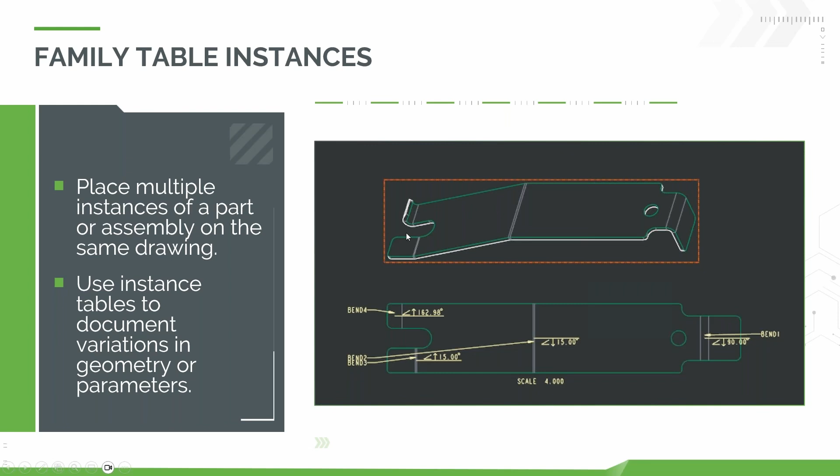Additionally, layers. So if you're not familiar with layers in Creo, maybe you might want to start the ball rolling with that. It's certainly something that's very powerful. People tend to underuse it, but it can give you a lot of control with respect to what you show in a drawing. It also gives you lots of control over what you show and see in the 3D environment, and is very powerful. Potentially misunderstood, or not understood to a full level of detail. So it's something to look at if you're not familiar already.

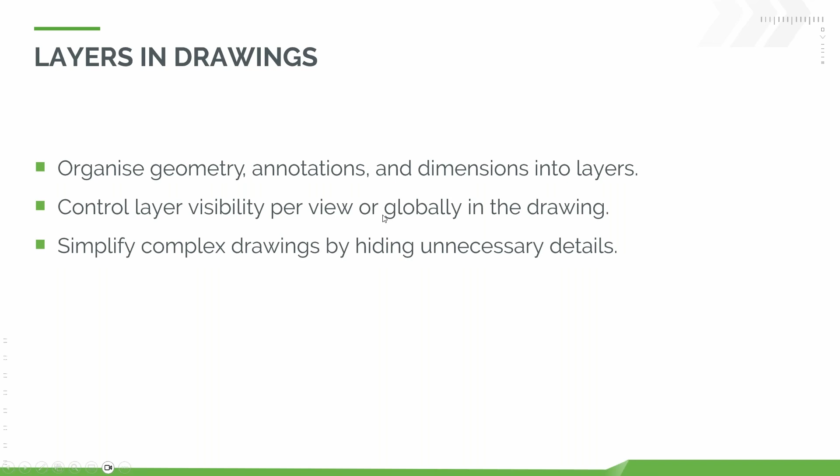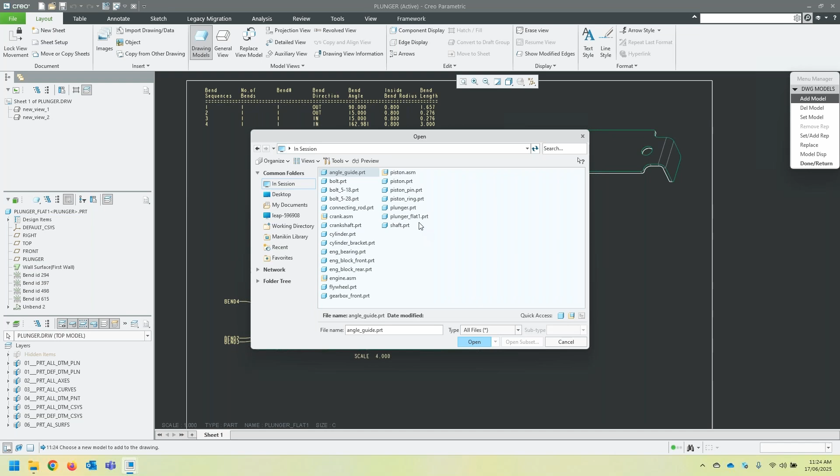Okay. So let's have a look at the family table. So if we open up this drawing, even though we've got a single sheet, referring back to what I just did a moment ago, we actually have two models in here. So these models, just so you're aware, drawing models, add model, just for example, I'll choose a different part. Okay, so now if I create a general view of that, I now have a completely separate model in here. Okay, so that's how this drawing was created.

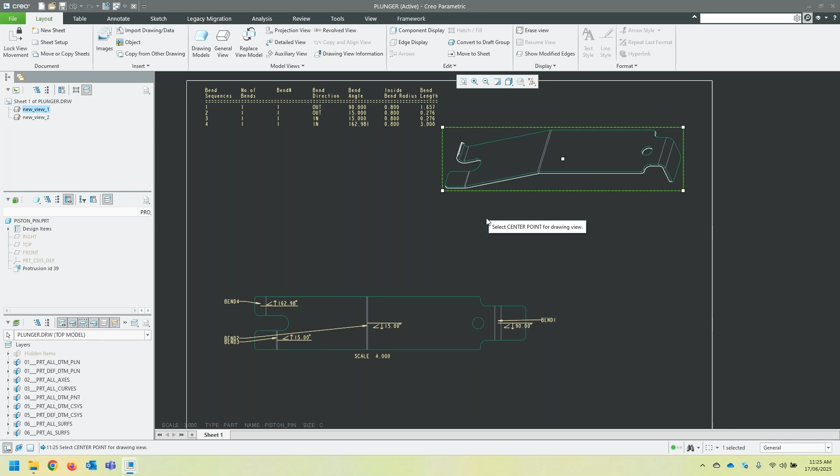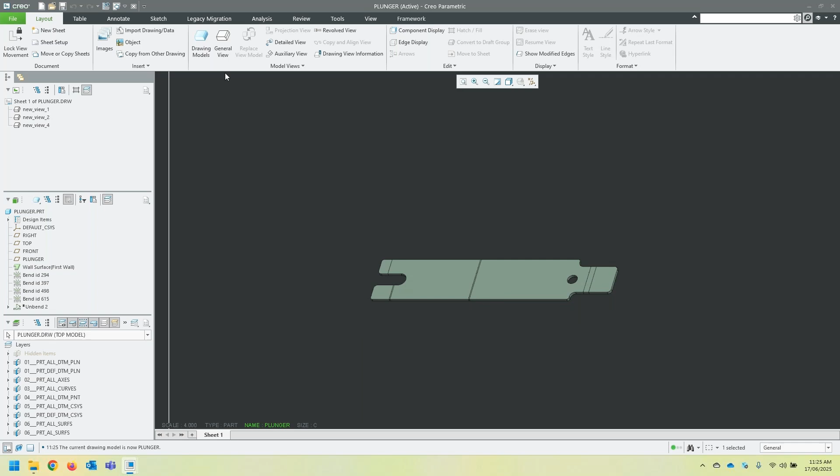In the first instance, someone's placed a view of the formed instance or the flat, whichever one they've chosen, and then inside the same drawing, they have the opportunity to choose between those. So if I say plunger flat is now the active model, and I create a view of it, then that's it there. If I say plunger is the active model and I create a view of it, of course there's a difference in scales here, but hopefully you get the idea that in the same drawing I've just created two different views of the same physical part file.

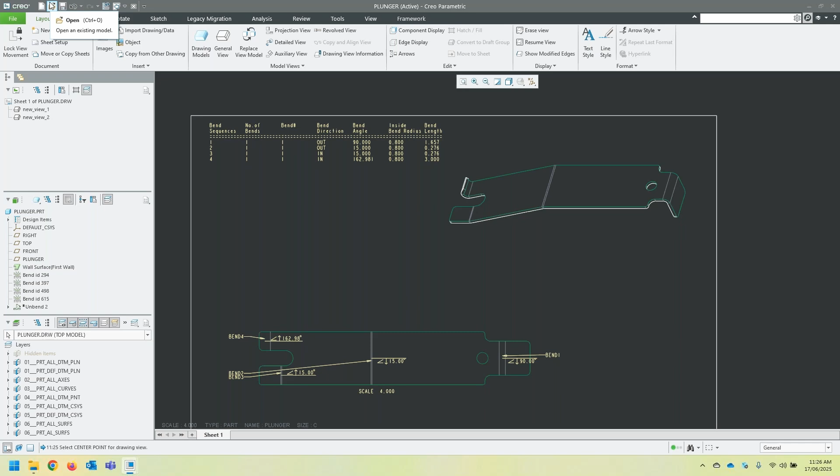But yeah, that's basically where family tables are sort of related to active models and so forth. Okay, in this case, this is showing some other sheet metal particular information. All right. The last thing, which I'm going to try and get through pretty quickly because we're getting towards the end and we might be running out of time.

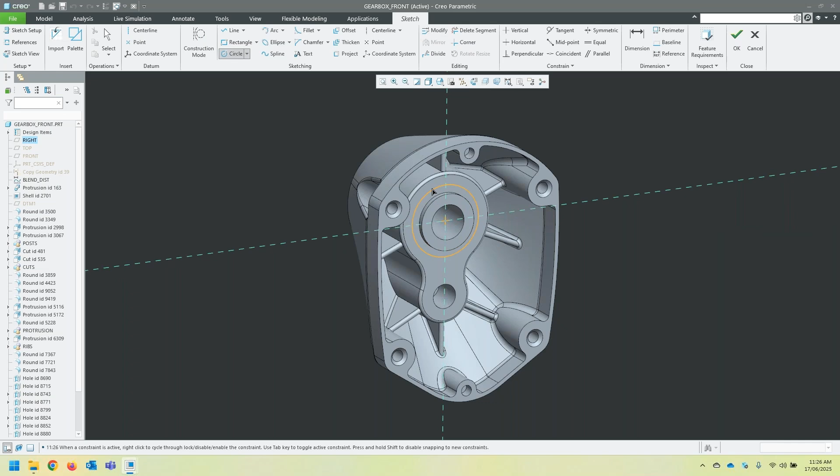So if I look at this model here, let's say what I want to do is open up that model. And for some reason inside my drawing, I need to show some sketch geometry inside a particular view, but not all views. So I'm just going to go back to the model and I've drawn a sketch in there. Hopefully you can see that.

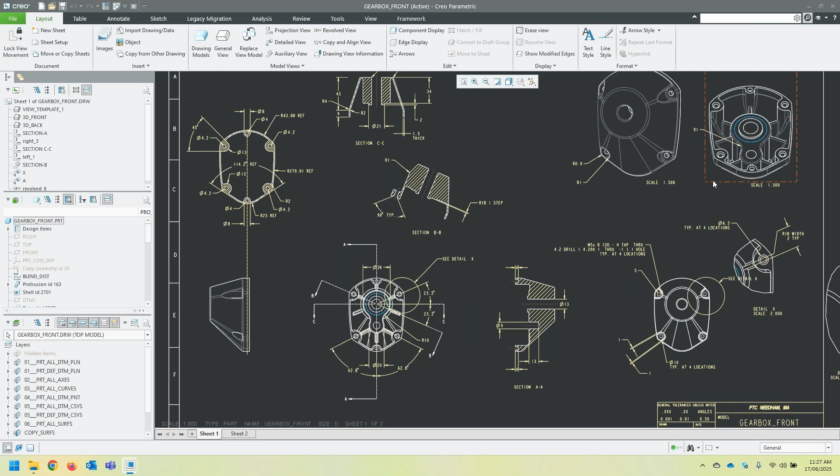Okay, so if I come back to the correct model, you can now see that that sketch is there. If you look carefully, it's shown in this view over here. It's also shown in this view, and because this is a detailed view, it's shown, this is basically this over here, okay?

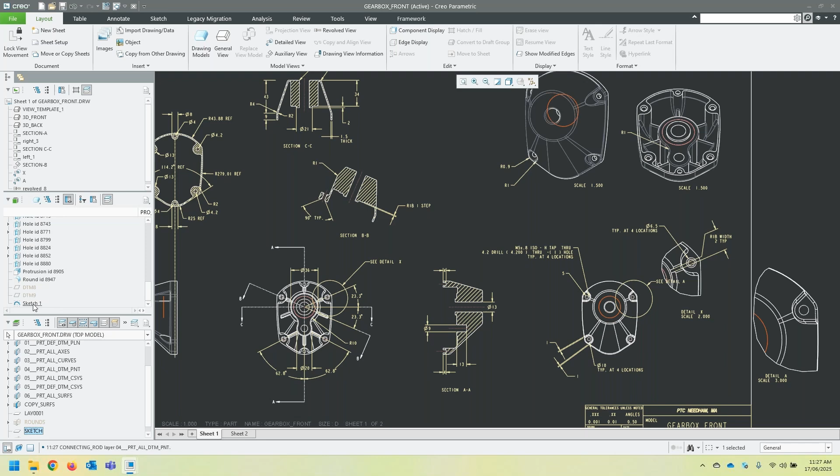Now, probably the easiest thing to do, if I don't want it to show in that view, would be to firstly create a new layer. So we can call this sketch, which we want to or don't want to show. Now the feature I created was this one here, the sketch feature. So I can go layer properties and actually select that sketch to be part of it.

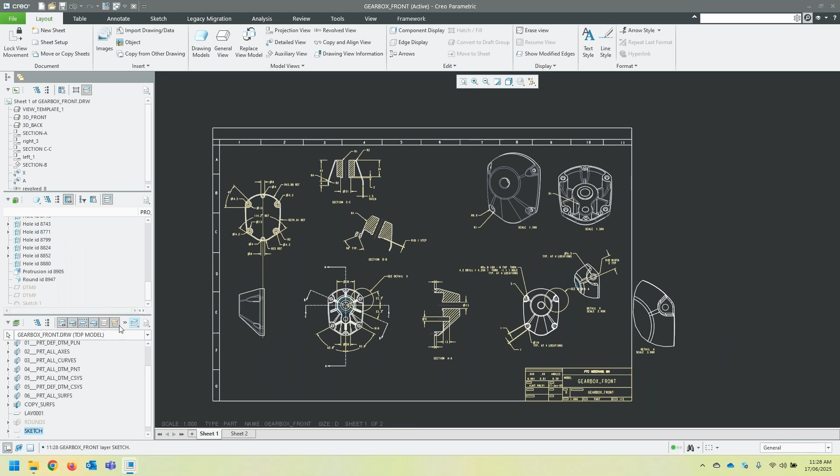Right, now, this is at the moment the whole drawing, so if I hide that sketch, sorry, yeah, so if I hide that sketch, then yes, that actually did work. Sorry, I was looking at the wrong thing. Yeah, so that disappeared from that view up there. If I was to show that sketch, then it's visible up there.

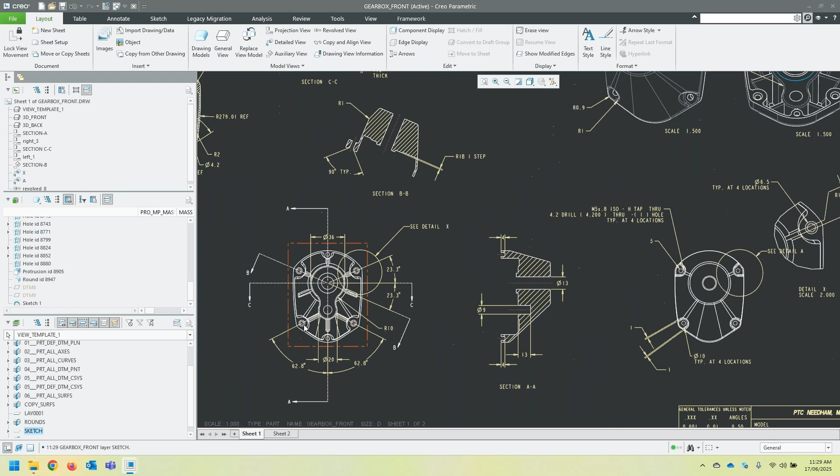Sometimes what we can do is use individual control, so we can pick that view there, and then in this view we could say hide. Okay, so effectively that sketch now is not showing in this view, but it is showing in this view. So we have the ability for all of our different views to show those particular items.